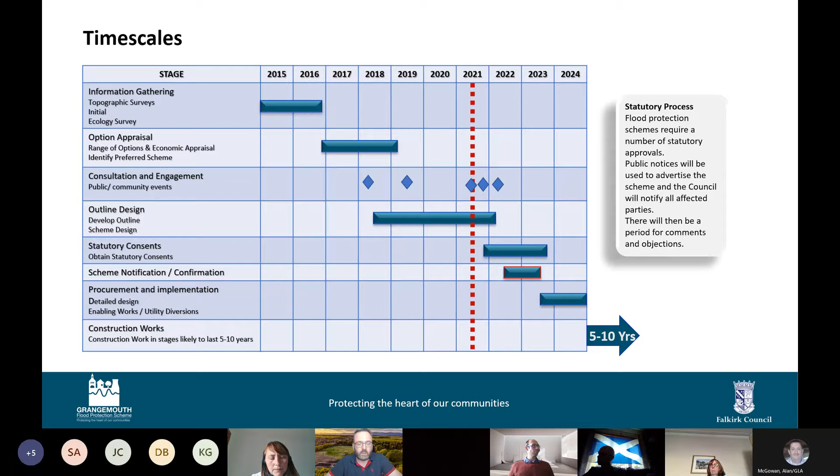When the scheme is notified, all affected landowners will be notified, and there will be an opportunity for people to put in comments or objections to the scheme, and those will be dealt with in a normal manner before the scheme is confirmed and then we go into the more detailed design and procurement of contractors to take the scheme forward. So as you can see, it's going to be a number of years before we even commence construction works. We anticipate it's going to be around 2025 before there are any construction works at all. And that construction period may last somewhere between 5 and 10 years. And as we go forward over these next few years, we'll be continuing to develop the procurement strategy and the construction methodology for each part of the project. Next slide, please.

So just as I touched on the previous consultation events, just a brief recap on some of the feedback that we did receive. The event in 2018, one of the key significant parts of that consultation was around the defences along the Grange Burn and the area of Zetland Park. Probably its most significant feedback was around how the defences would be aligned and what parts of the park would be protected or not protected.

The majority of people that voted looked at the option that reduced the requirement for defences along the upper part of Grange Burn. So we have no defences between Zetland Park and upstream towards Rannoch Park. And the defence alignment around Zetland stays quite close to the perimeter, to the edge of the Grange Burn itself, rather than the alternative that went around the periphery of the park.

In addition, through both consultation events, there were requests for more information and to be kept informed. So we've launched our new website and launched social media channels. We're constantly updating the website with more information, including the frequently asked questions section and some of the previous options that were considered. And we'll touch on some of those later on in tonight's session as well.

And obviously there was a request for further engagement sessions. Obviously with COVID over the last year and a bit, so 15, 16 months or so, it's been really difficult to get into communities and to engage face to face. But we wanted to have some engagement sessions and set up this series of events. We had 4 events last week and we've got another 3 this week, looking at different areas of the scheme and trying to get into each of those community areas and make sure people are more and more aware of what is planned and what's proposed in each of those specific areas.

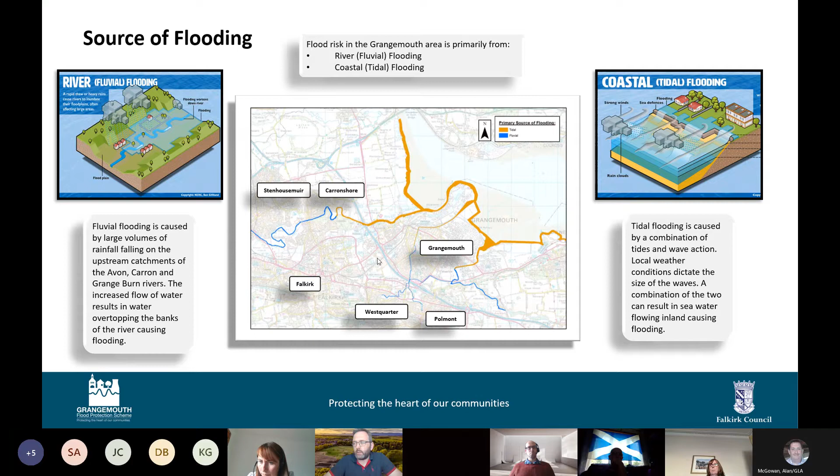So if we look at the next slide, this then just demonstrates those areas that could be affected by flooding, either by fluvial or by coastal flooding. And you can see that the extent of the areas at risk is quite extensive. Sometimes people in these communities maybe haven't been directly affected by flooding in recent times and maybe don't appreciate that there is a flood risk there. They do live close to the estuary or close to one of these watercourses and maybe don't fully appreciate the level of risk. This slide shows what is known as a 1 in 200 year flood extent.

And we're aware that obviously the terminology is a little bit difficult to grasp. So 1 in 200 year does not mean that there will only be one event every 200 years that gets to this extent. It simply talks about the probability of any flood event reaching these kind of water levels. And the guidance talks about a low risk, a medium risk, and a high risk. And a 1 in 200 year event is a medium risk event, with a probability of 0.5% in any particular year that the water levels could reach these levels and reach into these communities.

And these plans are also available on the website if anybody would like to spend a little bit more time looking at specific areas. You'll certainly be able to go in and look at the same information through the website.

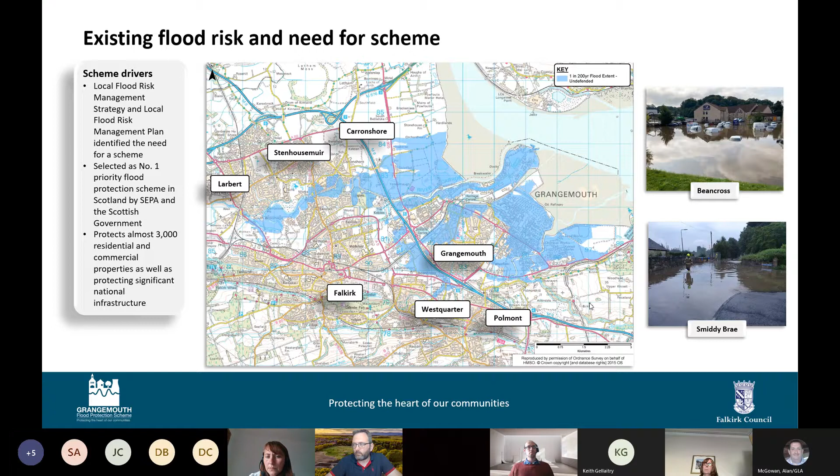And if we just look at the next slide as well, which obviously shows the western side of the scheme, mainly along the River Carron, you can see the areas of floodplain in blue, but the additional areas of floodplain in green, when a larger rainfall event affects the watercourse and there's more water coming down from the hills, obviously the potential for that water to spill into those adjacent communities increases.

And just to put it into perspective, at the current time, the number of properties who are affected by a 1 in 200 year flood event sits around 3,000. That's both residential and commercial properties. But by the time climate change effects are taken into consideration, the number of properties rises from 3,000 to almost 6,000 properties that are at risk of flooding. So you can see that the number of properties and the damage that would be caused to all those properties is quite extensive. And that's really why we're looking at progressing a protection scheme that will offer that resilience to these communities.

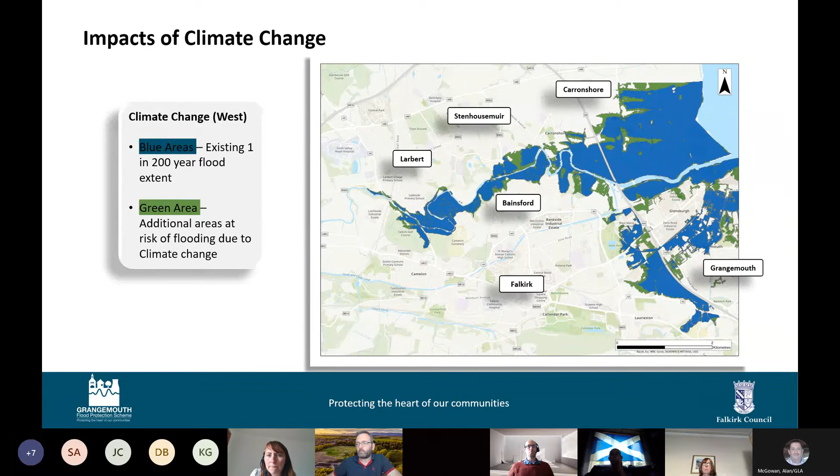As I showed on the previous slide with the timeline, and we'll mention it a few times this evening, there are a number of engagement sessions planned throughout this year and into next year, with the aim of raising awareness and making sure everybody's fully informed of what the proposals for the scheme are. So there will be further opportunities for communities and businesses and others to get involved. I really would encourage you to spread the word into those communities and speak to your neighbours and any other groups that you're involved in, to encourage them to look at the website and come along to any of the events that we hold.

So to take you through the next section, I'm going to hand across to Richard to begin speaking a little bit about the development of the scheme. Thank you, Alistair. I'm just going to talk through firstly some of the options that we've considered and discounted, then move into more about the flood defences themselves, so how they look and the different types. Then I've got some plans to go through which relate to the scheme and where we're proposing to put structures, and then I'll touch on some of the environmental impacts, and I'll then move into more examples about flood protection schemes. So next slide please, Alan.

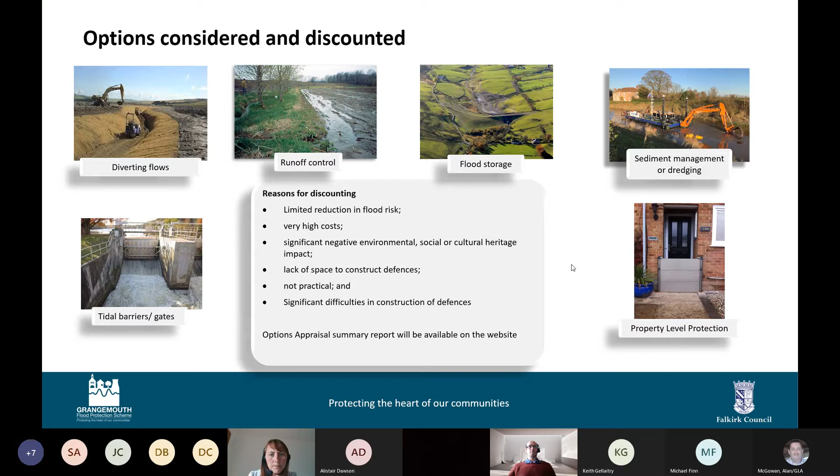Alan, has that changed on your screen? It has changed on my screen. Yeah, it's changed on mine as well, Richard. It's the flood defence type, so hopefully that's changed for everybody else. It's not come through, Richard, no.

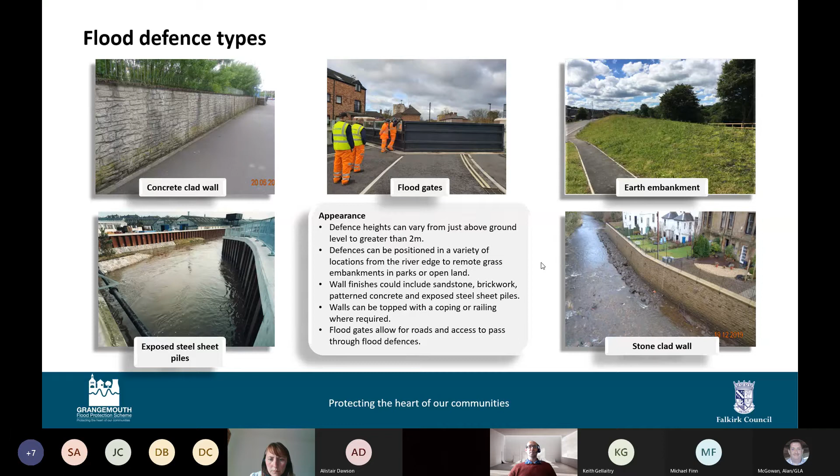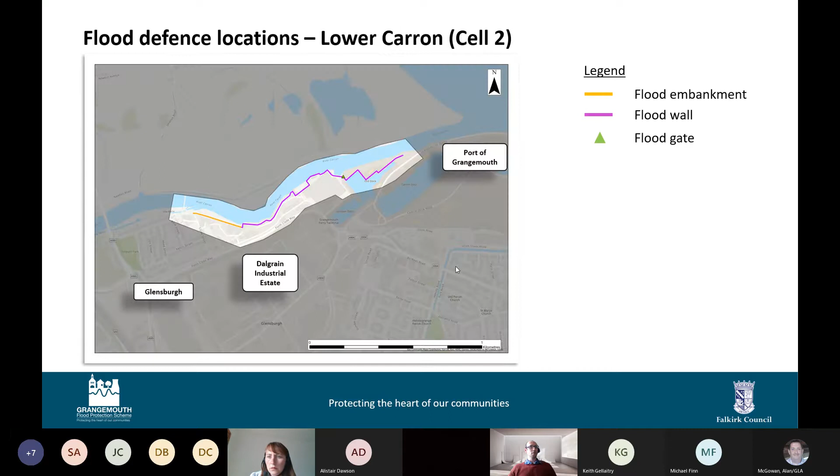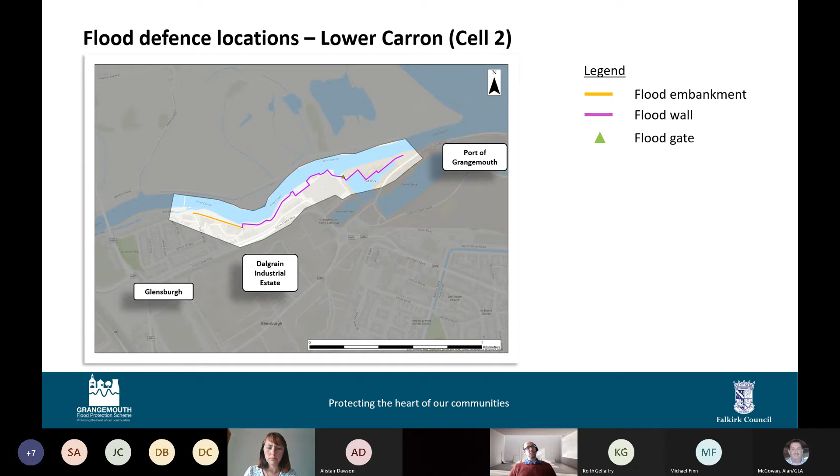Moving on to cell 2. This covers the lower Carron, which covers really, I suppose, the Glensburgh and into the port of Grangemouth area. So we've got a flood embankment that ties in with the high ground at the canal entrance. And this continues where, I suppose, the Charlotte Dundas path is now. And then we have a flood wall going along through the Jarvie plant site and around some of the warehouses there, and through or around the rear of the Grangemouth Yacht Club and nearby the Grangemouth old school building. And the defences here stop as such, but they actually tie into the next cell, which is cell 3 in the port. So we'll move on to cell 3.

So one thing here is the lock gates: we need to raise the height of the lock gates to make sure that if we do get a 1 in 200 year tidal event, we can actually hold back the water from a height point of view. But structurally, the lock gates at the moment are designed as though the water in the port is higher than the water level out in the Firth of Forth.

So structurally we need to do some work to them as well, to make sure if it's the other way around that the gates can withstand that force. And also we need to be conscious that this is an operational port, so there are going to be vessels using that lock as well. So that makes it a bit more interesting from a construction aspect, and how we build it and the time it's going to take to build it as well.

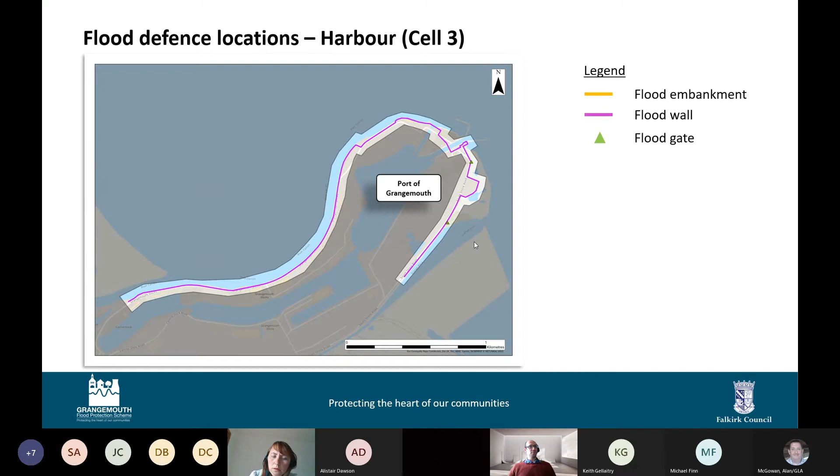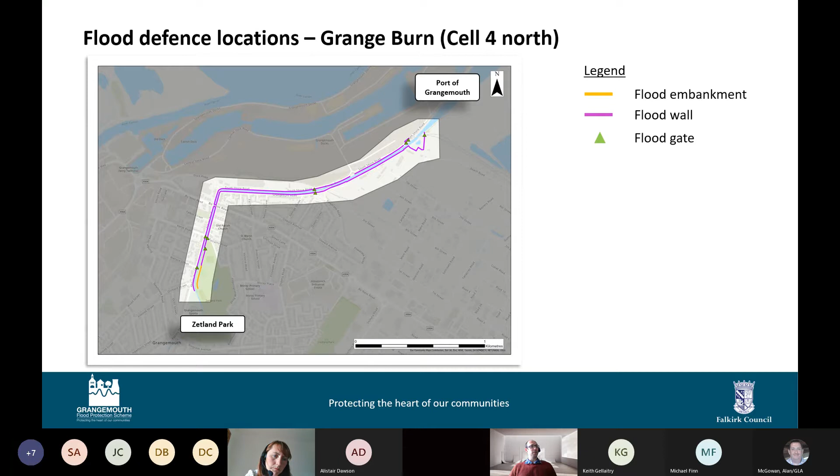It's worth noting the defence there won't stop there. It ties into cell 6, which we'll come to in a minute. But on the other side of the road, we've got a flood defence that starts just north of the leisure centre, and again it's parallel to Abbots Road and South Shore Road, at the edge of road or top of bank. We've got a flood wall to go down there continuously, and we have identified a number of gates at the roads and footbridges as well. And the southern part of cell 4 covers the Bean Cross area, Millhall Burn, and also the flood relief channel.

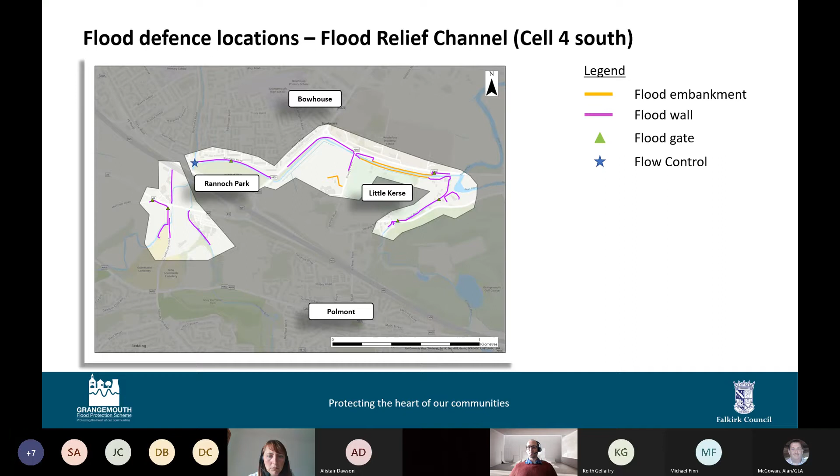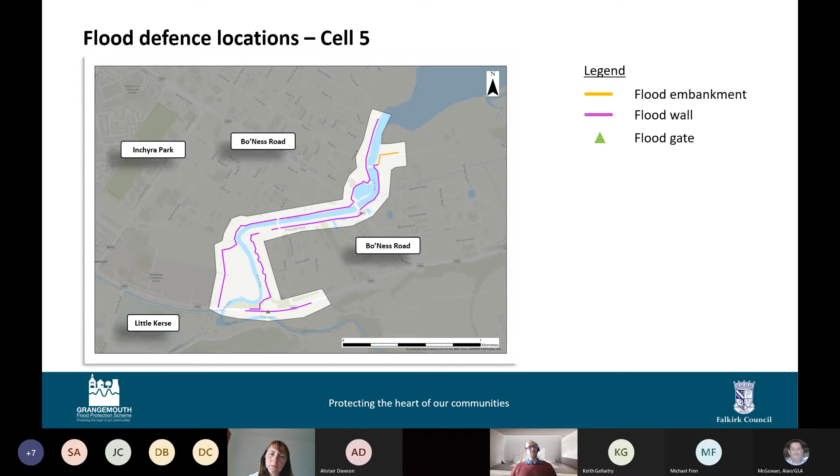So moving into cell 5, we've got continuous flood defences from north of Hull Flats Road. This is all through the industrial petrochemical plant complex. The defences to the south of Hull Flats Road are there to stop the River Avon flooding over Hull Flats Road, which would close the road. So that's why they're there. But basically, where these defences finish at the mouth of the Avon, they tie in with the flood defences for cell 6. So the structures are continuous here, and this is cell 6.

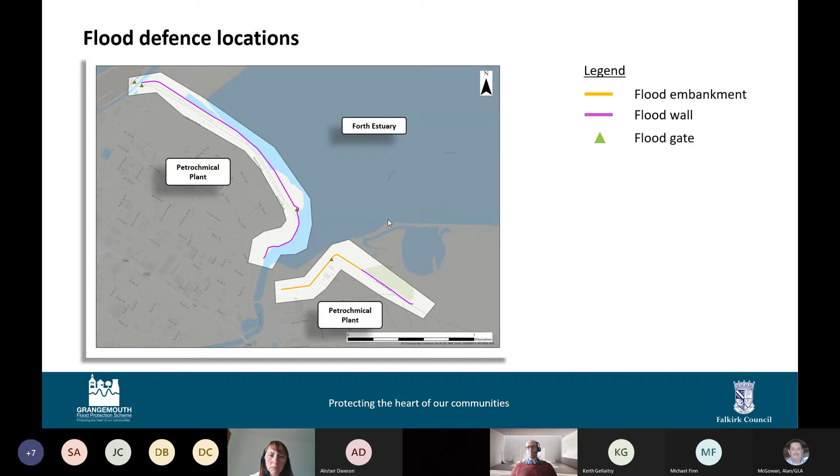Next slide, please. So the environment is, I suppose, a key consideration when we are developing a flood protection scheme. Alistair's already mentioned it, but a number of environmental surveys have been carried out over the last 5 years, and this all feeds information into the environmental impact assessment, which we are producing. The survey information provides the project team with particular information about different species and about how they could be impacted by the scheme over a short, a medium, or a long term.

Where possible, we are trying to avoid any impacts. That's not always possible, so then we need to look at appropriate mitigation that we can adopt that will reduce that impact. I suppose it's also worth noting here that we are aware of the carbon footprint of a scheme, and we are having to look to reduce that where we can.

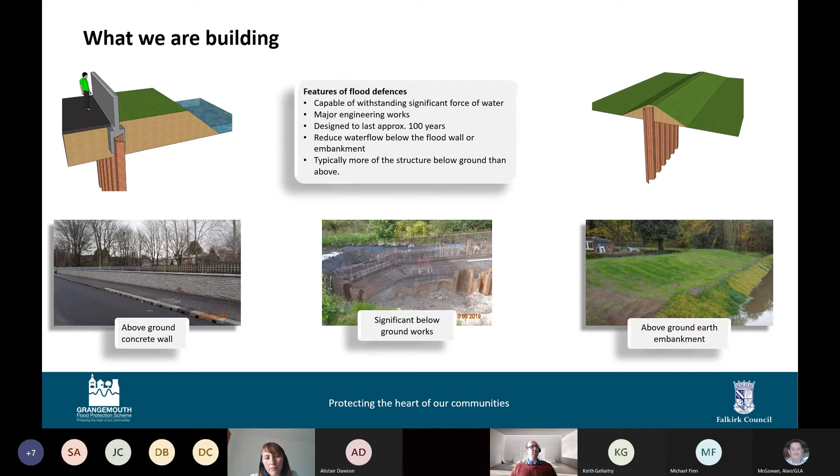In the bottom pictures, on the bottom right there, you've got an embankment next to the watercourse. Bottom left is a flood wall with a railing on top, and the middle one gives you an idea about the sheet piles in the ground that you don't really see, because there's a reinforced concrete stem that's going to be built above ground there. Sorry, next slide.

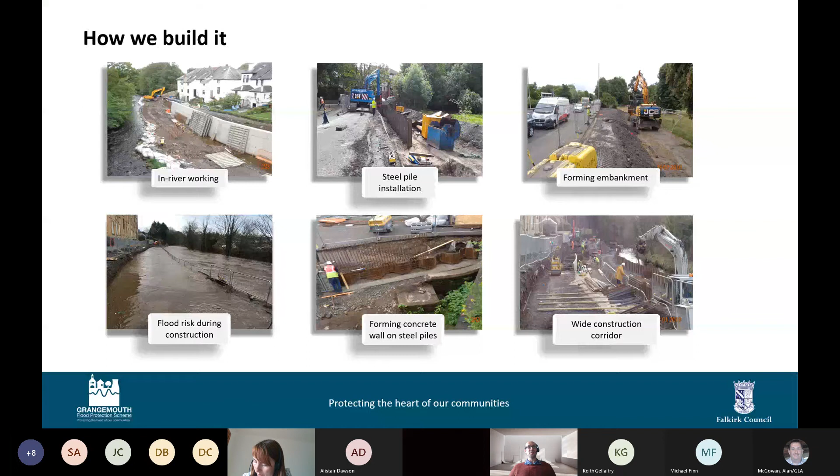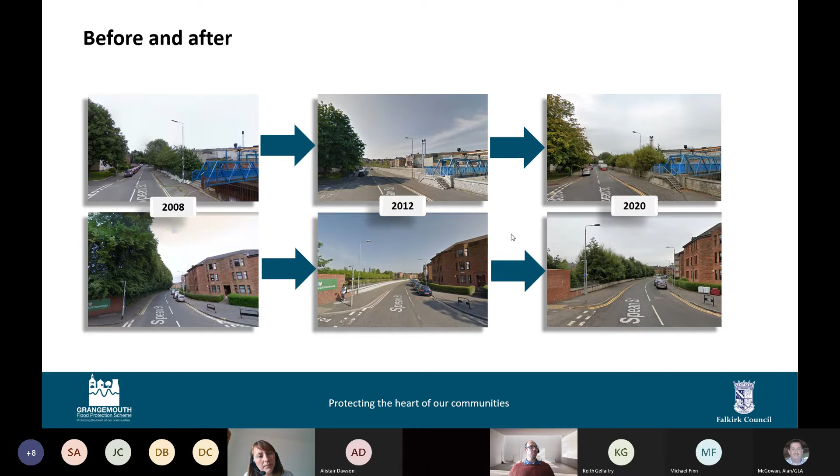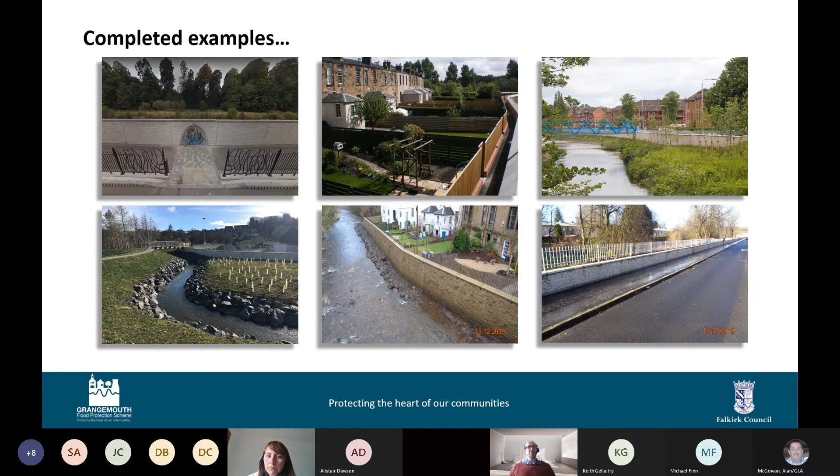Excuse me. Thanks, Richard. Thanks a lot for that. Yeah, so just to touch on what we've referred to a few times this evening, tonight's event is part of a series that are being held this week and next week. It builds on the previous consultation exercises that we held in 2018 and 2019, and there will be further events planned both through this year and into next year. And indeed, even as we go forward into construction phase, there will be ongoing methods of communication between the project team and the local communities to make sure everybody's familiar with the impacts that construction phase may have on individual communities.

Obviously, as I mentioned earlier, it's been difficult to have face-to-face meetings over the last year, but we do hope to have a public exhibition probably in the springtime after Christmas, where there will hopefully be an opportunity for the communities to drop in and discuss any issues with the project team.

And sitting alongside that, we also have a STEM educational programme, which we're already developing with colleagues in the education department. So we'll be working with both the primary school and the high schools as part of the school curriculum. And there will be opportunities through that for some competitions, and we hope the winners of those competitions can be announced and be part of a science festival that's planned for Zetland Park next year. But there will also be opportunities as we go forward through the project for some educational visits when there's activity on site, for those school children to come down and see the site in action.